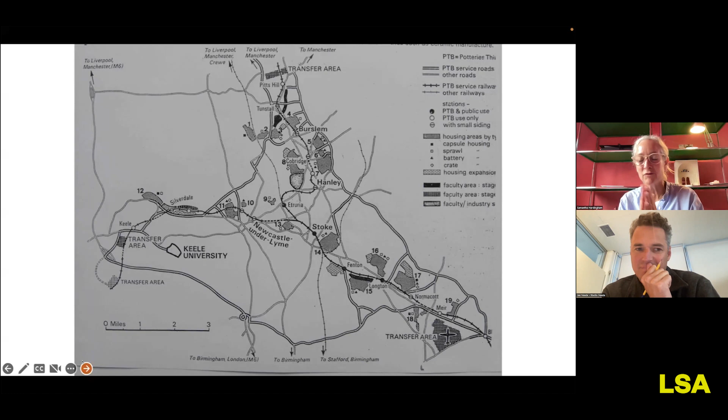But I really want to hand over to Jan, because I think what's important is this, just to remind everybody, this is 1964. We are now in nearly 2024. And that's an awful long time for thinking about, in architectural terms, the complexities of working with very dynamic systems, and really thinking about the reinvigoration of land and whole areas of countries that are undergoing massive change. And we are absolutely in that moment now. I know that Jan is working on a project which I'm just about to learn a lot more about, but I hope some of this resonates. So I'm going to hand over to you, Jan, now, and hear about what you're doing.

Well, it's difficult to pick up from here. It's always fascinating to hear from you about Cedric.

Let me see if I can share the screen. You should be able to see my screen now.

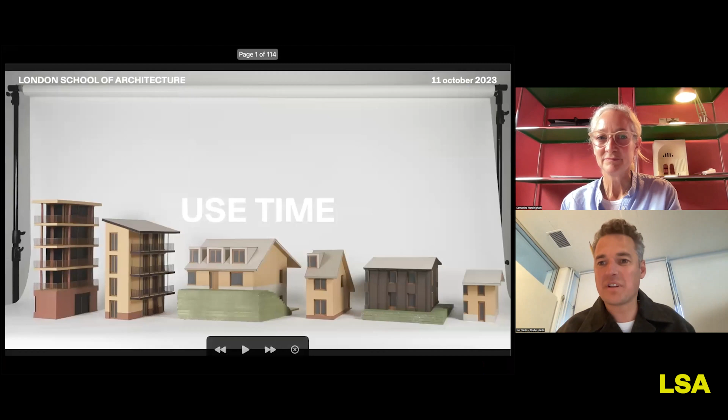I'm going to get nowhere near the sort of level of experimentation and inventiveness that you just described. I'm going to give you a small insight into a much more mundane form of practice, but it's always about time. It's often about Cedric, who is, to me, a kind of parrot on the shoulder, who has a kind of conscience role. And it's often also about housing.

I thought I'd briefly say something about who we are as a practice and how we work. And then I was going to show you two projects. I decided to make it one, so we can go a little bit more in depth. I also thought it would be good to show the process of acquiring such a project. I was thinking that this is something that I missed in school. It took me years after graduating to figure out how you get your hands on interesting work. So I'm going to talk about that as well a little bit.

So who we are and how we work. Well, Sam already gave this introduction. I graduated in London in 2011. And at the time, I really did not want to become a practicing architect. I was much more interested in making events, working on publications, exhibitions, a lot around Cedric, but also other things. I was fortunate enough to work with Samantha and work in fantastic institutions like Bureau Europa, like the Venice Biennale and Woodbury University in America. But after a while, I received an opportunity to do some physical work, like building work, and actually that was surprisingly good to me. So I decided to fully go for a career as a practicing architect.

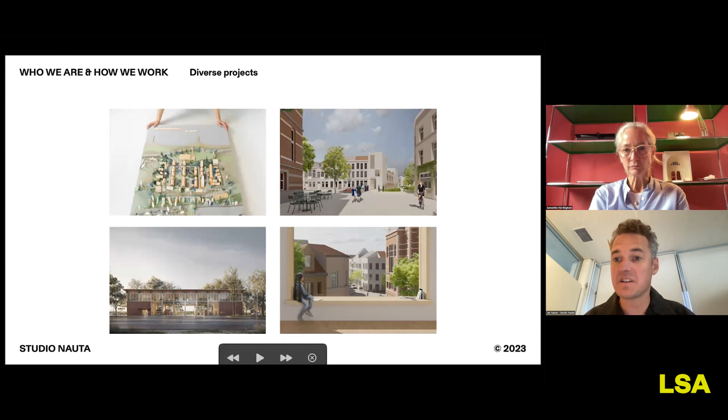In recent years, we're working on a much broader range of projects. So we're doing master plans, like big frameworks for housing. We're working on a library in Antwerp. There's a fire station also in Antwerp, so that's in Belgium. So the work tends to focus on community buildings, on larger housing projects where we are very interested in the sort of industrial transformation that the construction industry is currently undergoing with new raw materials.

And we will always continue to do small projects like this little swimming pool and a pool house. Those projects allow us to experiment with, in this case, materials such as rammed earth. We always work together, often with other architects, but always closely with clients and with builders. So that idea of really immersing with the world that the project sits in is important for us.

Also to create the kind of influence that we think we need to get the things that we think are important done. So that's just a brief introduction of who we are as a practice.

And from now on, I'll be talking about one single project, which is the garden housing city. Let me just see if I can make zoom smaller so I can see slides. There we go.

So this project started for us as a competition organized by the chief government architect that we have in the Netherlands. That's a kind of national program for spatial quality, and they have, for a few years, been working on this program for bio-based and nature-inclusive building. It's a program that tries to stimulate innovation in the architectural and construction industry, and they do so by organizing competitions throughout the country.

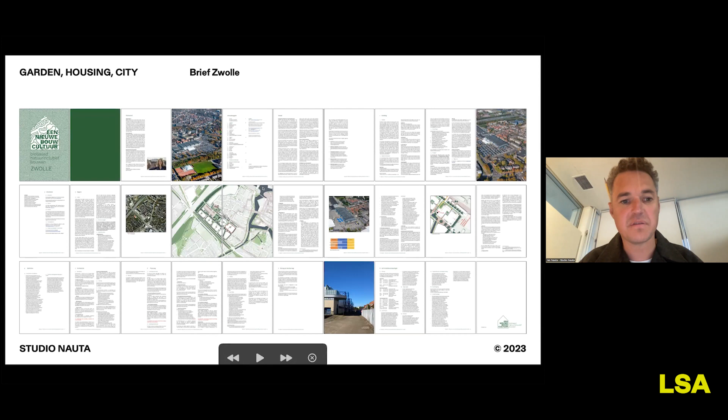It starts like this: it's an open call with a fairly compact brief where they outline the ambitions for the site, the ambitions for bio-based and nature-inclusive building, and what that is will become clearer as I show the project. But it's this fairly general invitation to participate.

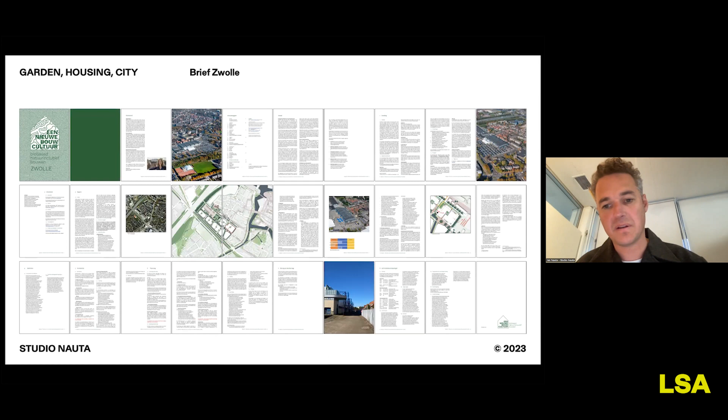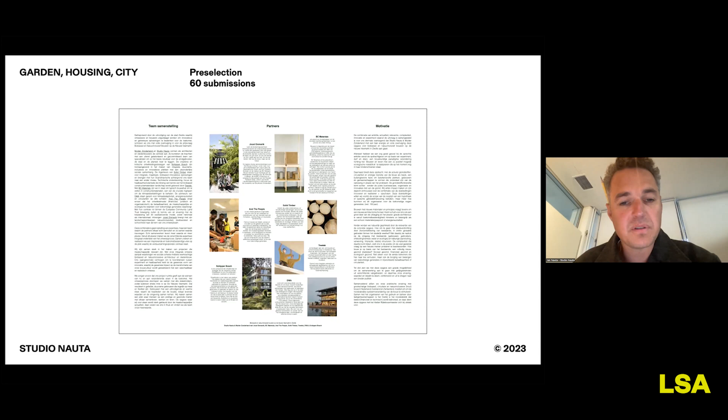So it starts with a pre-selection, and there were 60 submissions. And this is ours. We were allowed to submit 3 A3s. And what you see here is a proposal for a team.

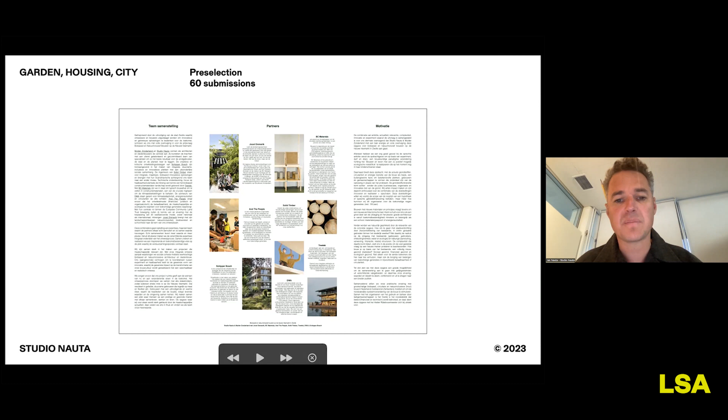So we decided to sign up with a broad team. The requirement was that you would be architects, but we included a landscape architect, a material specialist, a timber engineer, a timber construction company, a sustainability engineering advisory consultancy kind of club, a developer, a social entrepreneur specializing in community land trusts, and wrote a little motivation, showed some work of our office and Mulder Zonderland, which is a practice from Switzerland that we collaborated with on this particular project.

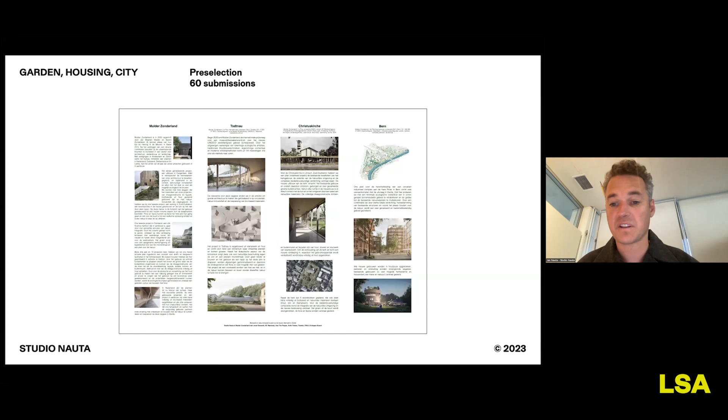So this is what it looks like, the submission in the pre-selection. That got us through to round one.

And in round one there were 5 teams left of the 60, and we were invited to make a compact vision on the site. So I think what you see here is a very rough drawing of what the buildings could look like, but it's a lot of ingredients that we proposed.

So it's about porosity, it's about an idea about energy, it's about water management, it's about a relationship to the delta, the rivers in the area. It's a suggestion about prefabricated construction.

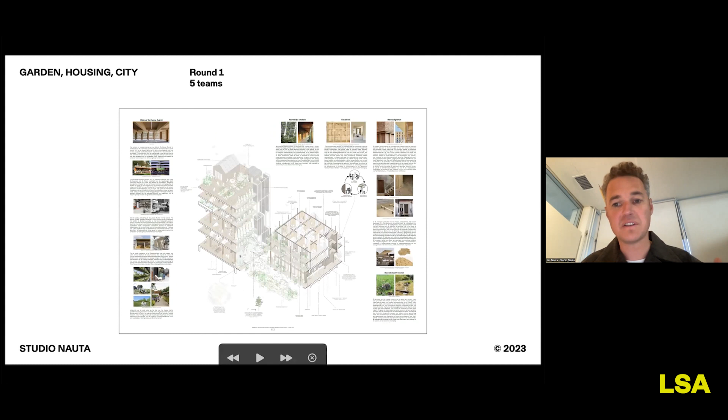So it's mainly kind of teasing them a little bit with rich ingredients, and then on a few points diving into it and illustrating how that might materialize. So these 2 A4s then got us through to the last round.

With a jury report, and that's always very straightforward. They appreciated the clarity of our vision. They appreciated that we understood the local situation rather well. They appreciated the suggestion that we would incorporate a community land trust. They thought the images that we were showing were fitting to the agenda.

And they were also critical of our use of architectural jargon, basically encouraging us to work on the legibility of our presentation. So it's as straightforward as that.

Then there's round two, or the final round, and I'm now simply going to show you the presentation that we gave at the final presentation of this competition. So again, that starts with who we are, introducing the team, so all the advisors that we had around us, and then what do we want? What do we want from this competition?

We identified three key pillars that we built the project around. The first one is to connect people, plants, and animals. The second one is to make a healthy city that would be accessible and would remain accessible, and by that we simply mean affordable. And the last one is to eliminate as much CO2 as possible. I've occasionally in the presentation stuck these slightly ghetto translations over the presentation, but I think you'll get it.

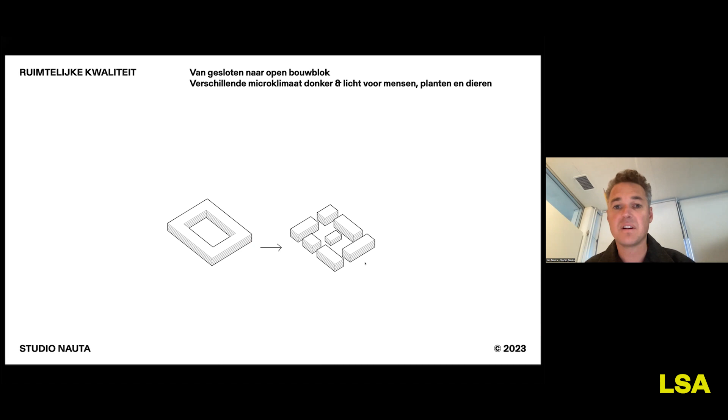So the first thing we said, rather than making a closed perimeter block that would be very logical on the designated site of the competition, we suggested to fragment it, to create many more microclimates, to create a lot more air, and to create porosity at an urban scale.

By breaking the block up, we also managed to connect to the secondary routes of this area. The site is a former cattle market where farmers would come to trade cattle. It's completely vacant now, but it has a neighborhood around it with a lot of pedestrian routes through it. The small scale of those pedestrian routes—we suggested we could integrate that, building on the logic of this neighborhood.

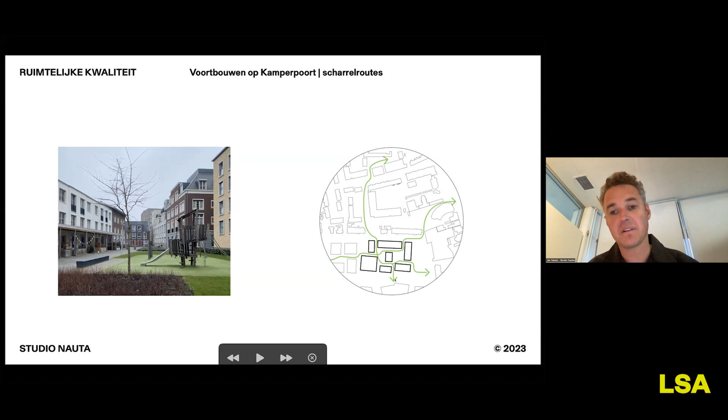The other thing we saw is that there are a lot of in-between spaces in this neighborhood—these secondary structures like balconies and porches, this in-between of public and private. We thought that was a great quality.

The other thing is that the old cattle market had a clear perimeter. It would always be open—you'd be able to get in and out without any problems—but there would be a clear marker, like a kind of gate. This strong feeling of being inside and outside, we thought was important.

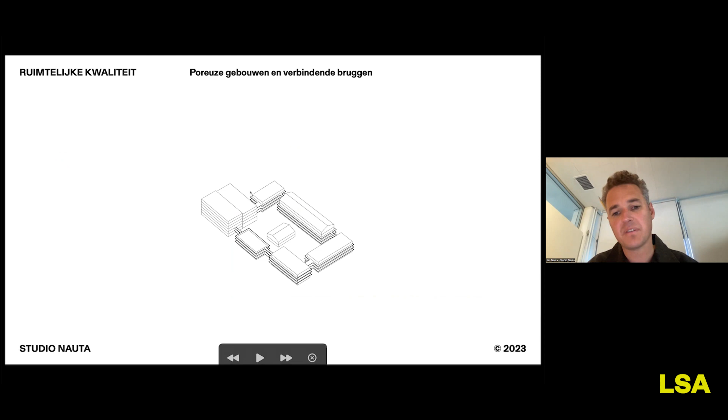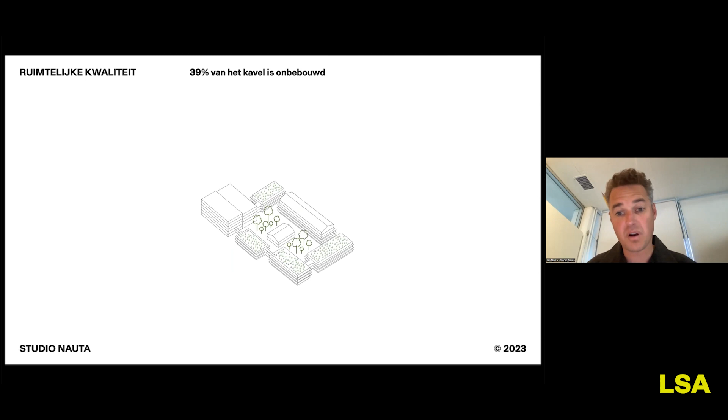The program, the actual dwellings that make up this housing project, is a mix of co-ops—corporation housing, which is, I guess, social housing in English—owned by a corporation that gives it out with subsidized rent. Then there's something we call the middle-priced apartments, all regulated by law in terms of cost. And then there's 32% open market, free market—that's where the profit comes from in order to pay for the other things.

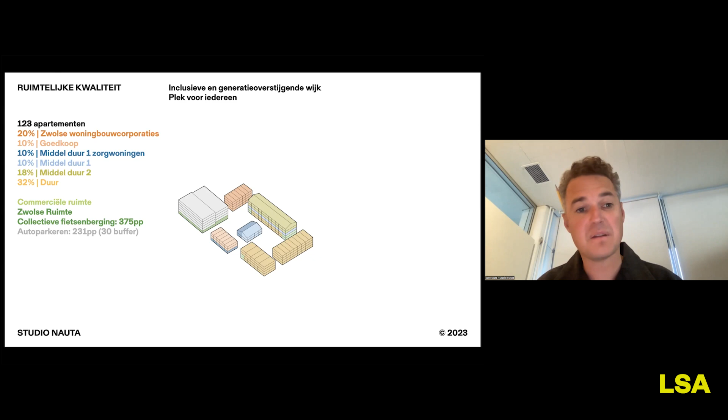I think this mix is really important. And we convinced the municipality and also the developer to give the best place not to the free market dwellings, but to the co-op. So that was a good thing.

Along with the architectural design, as I mentioned, we have linked a community land trust to this project—I'll get into that a little deeper later on. In this presentation, we also project a kind of timeline of how this community land trust emerges.

Actually, before we start construction, we start a dialogue with the local community about what the community land trust should entail and what the concerns should be. The neighborhood will form a kind of panel that we can also use as a feedback loop for the design.

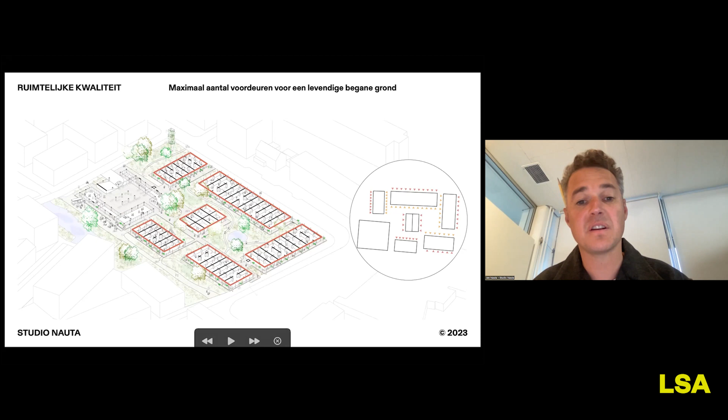What you also see is that there is one building that is not for housing—this is the hub building. It has meeting spaces for the people, a community kitchen, a community bicycle workshop, bicycle storage, and above that, for the next decades, also car parking.

The architecture is very straightforward, a very rational grid structure. That's for two reasons: on the one hand, to make the timber structure as affordable as possible, so small spans, very legible and clear, repetitive structural elements.

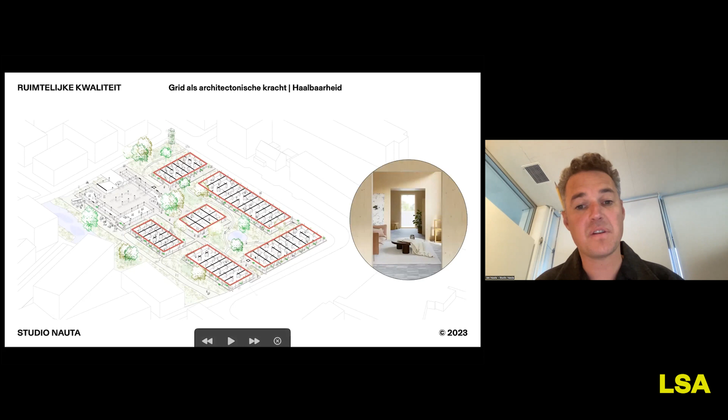But you also see that there's this kind of enfilade structure in the dwellings, so it goes from room to room, no corridor. That also adds to the flexibility of the scheme. On the basis of that grid structure, you're able to connect or separate these grid boxes both horizontally in plan, but also in section as duplex apartments.

The buildings are surrounded by balconies on both sides, which gives freedom—think of living on one side with a private balcony, and having a little business on the other side, so you could create multiple entrances to these dwellings. That level of flexibility, we think, is key for the future proofing of our cities.

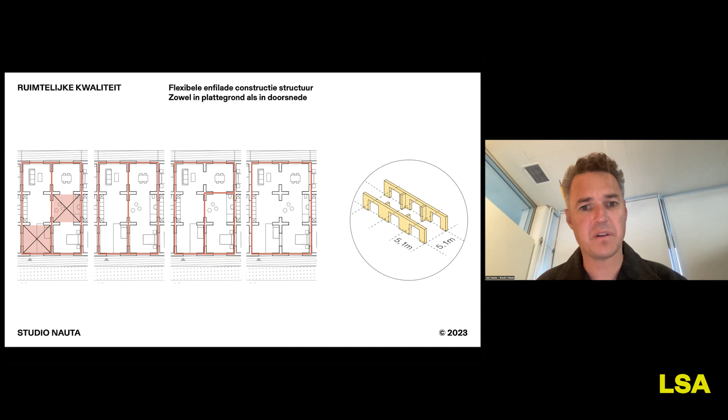So here you get an idea of that balcony, or that double facade that runs around all the buildings.

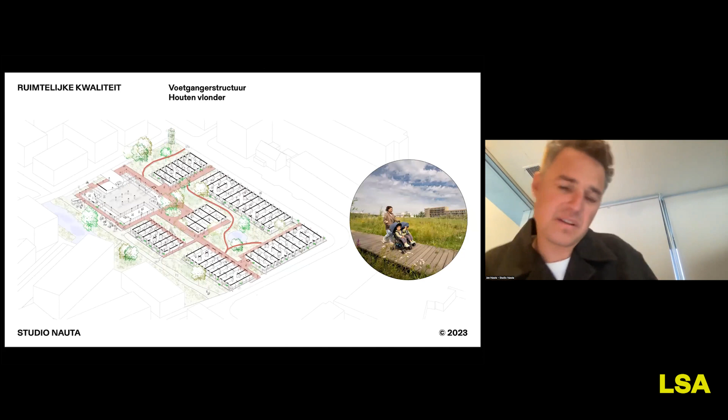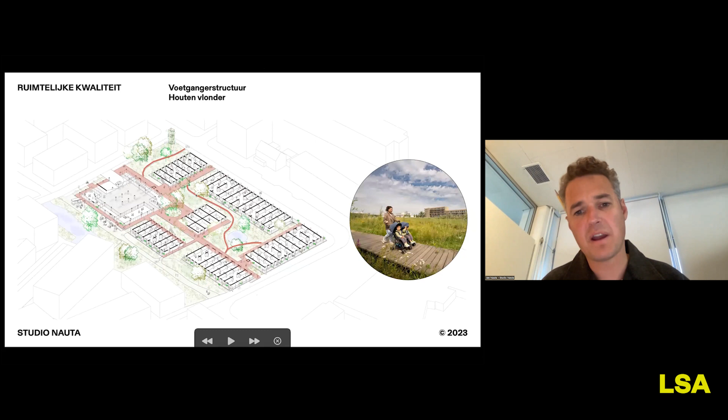I think here you see the ground plane. The ground plane is split up into two layers. There's a kind of pedestrian deck that's slightly elevated above the actual ground, with the idea that the deck is for people and the ground is primarily for plants and animals.

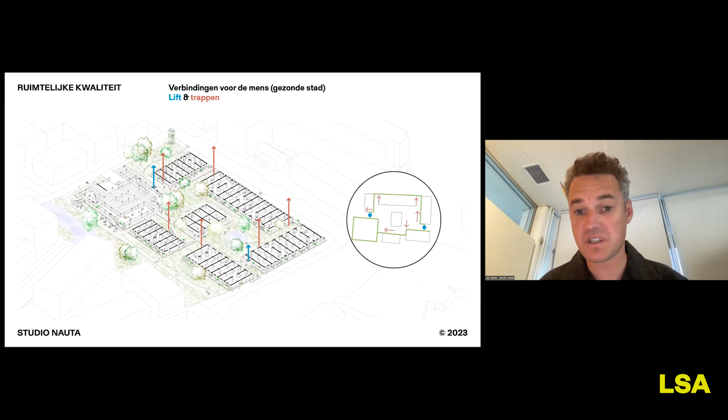By linking these buildings up with bridges, we were able to reduce the amount of cores significantly. The blue dots are lifts, and the red arrows are stairs. We're basically able to halve the amount of core space this way, leading to a more feasible business case, which we really need in order to build with all these bio-based materials, which are simply a bit more expensive than a traditional concrete way of building.

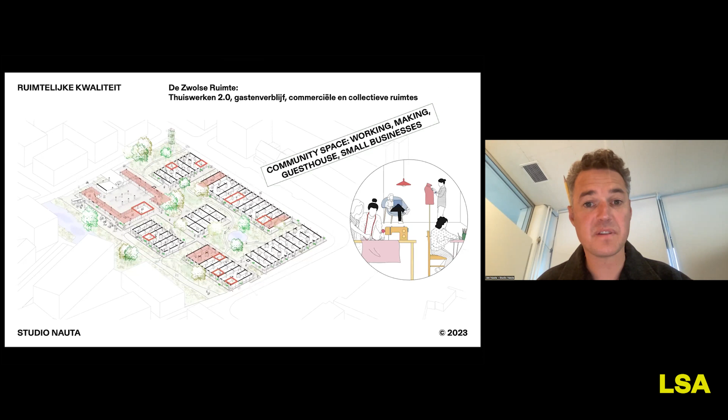As I mentioned, the hub building is a kind of community space. It has space for working, it has space for making. There will be a guest house, and there's room for small businesses. There's also a community living room and kitchen, and a bicycle workshop—lots of bicycle parking, so 123 homes and 400 bicycles that need to be stored.

This is Holland, so the bicycle also has the best space in this mobility building at the ground floor. Above it will, over the next decades, be a structure for parking, lots of cars. But we think parking is a temporary problem, so this building has been designed so that it can become a school, an office building, or more housing. It's very generous with the ceiling heights.

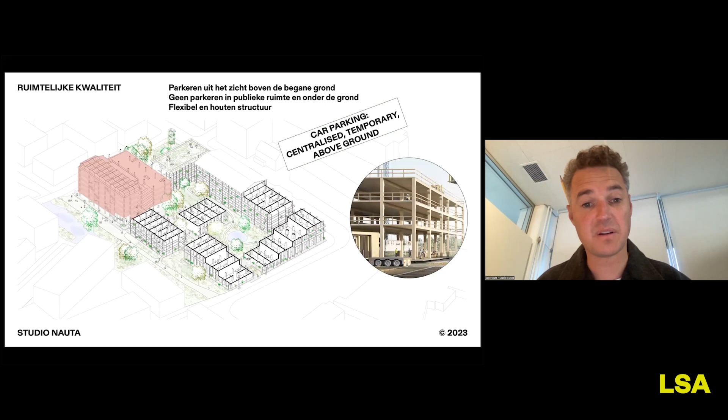Everything's in place for installations to be integrated into the structure, and it can also be dismounted if necessary, because all the connections are dry—nothing has been poured. And here you see a kind of speculation of what that plinth might look like.

So the idea is that in 2026, two years after we started, the community land trust will actually be founded on the basis of the rule book that's been made up with the local inhabitants. This is the key moment where the members of the community land trust give their final input for the material agenda and the architectural agenda of the project.

I'm going to skip a few slides so that we can make it all in time.

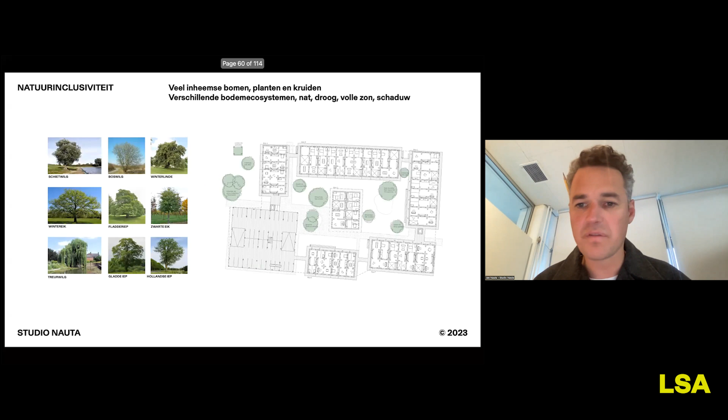Obviously, there's a lot of attention for biodiversity—the kind of trees we use, the kind of nesting spaces integrated in the buildings, so bats in the roof. The buildings are all lifted so that animals such as mice, snakes, and these kind of things can all go under the buildings, so the trajectories through which they move through the area are much larger than if the building would stand on the ground.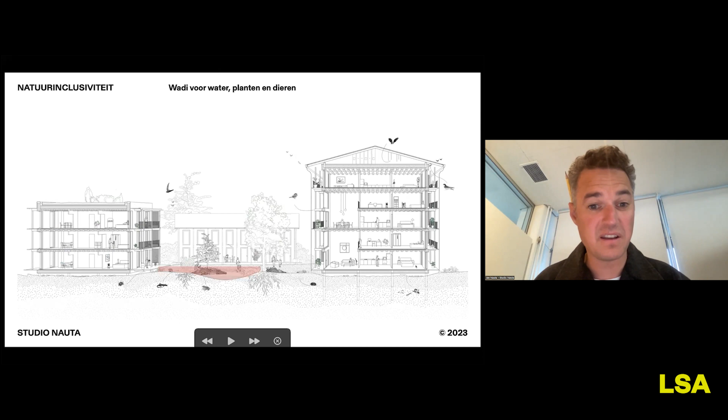That really adds to the biodiversity, and you need all the insects, obviously, to attract the birds, so we work with an ecological expert to carve out as many fertile spaces for animals around the building. You also see that double facade that's also a key nesting space for birds.

Here you're standing in the middle of this project, so you see the raised decks, you see the actual ground, which is a combination of water retention and vegetation. You see that there's no private gardens, always decks. All the dwellings are oriented around this green heart, and you see that the stairs always get priority over the lift—we really try to encourage people to move physically with their body.

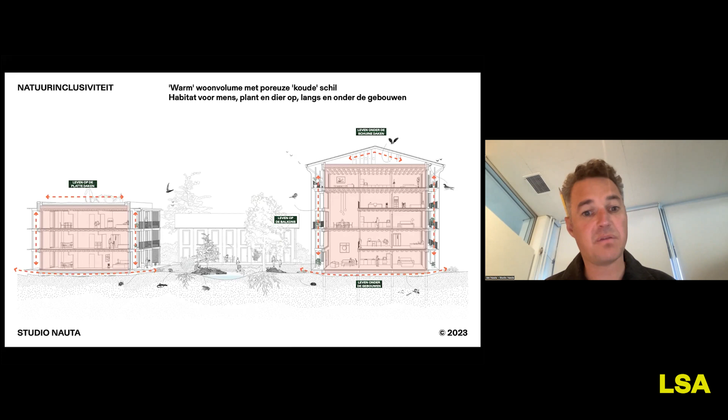This section also has an economic side to it. The buildings have been made in the simplest form, because the thermal envelope is the most expensive part of the building. So the simpler we make it, the more affordable it becomes. The richness in the forms comes from the cold structure around it. By separating the two, we gain a lot in the business case, through which we can then afford better materials, make floor to ceiling heights a little bit more generous, etc.

Jump through that quickly. This is the idea of the structure of this community land trust. So the main stakeholders are the inhabitants, but also people in the surrounding neighborhood have a real stake, and the municipality has a stake. And then the community land trust has a number of sub-associations.

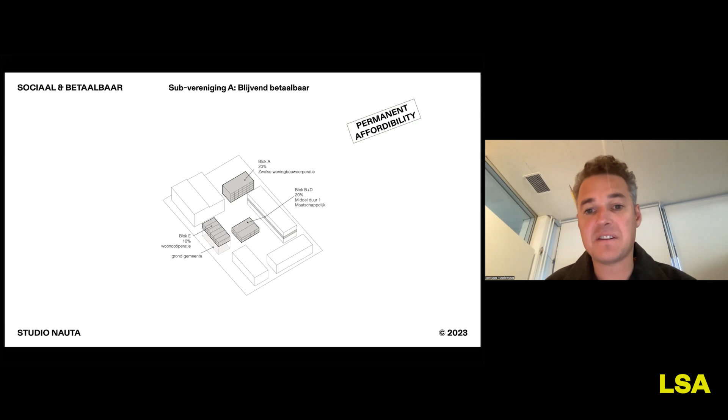One is to do with circular materials, so where do the materials for the buildings come from, and where do the materials for the maintenance of the building come from. One is about mobility. One is about the hub building, the collective spaces. And one is about permanent affordability, to ensure that these homes are kept out of the sphere of speculation. They will not be part of the housing market, but will remain in ownership of the cooperative. That's the idea of permanent affordability. It doesn't apply to all the blocks, but to the darker gray ones here. So that's also a balance in the business case in order to get it done. It's the mobility building, it's the hub structure, and this is the circular material.

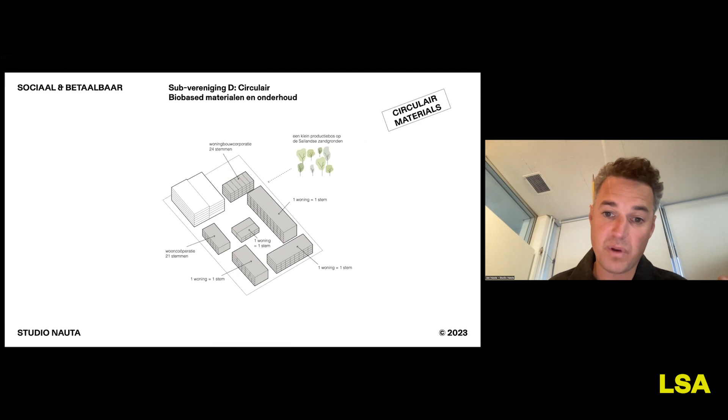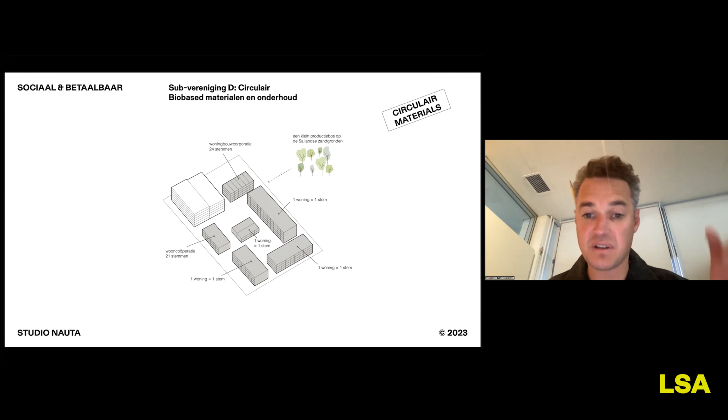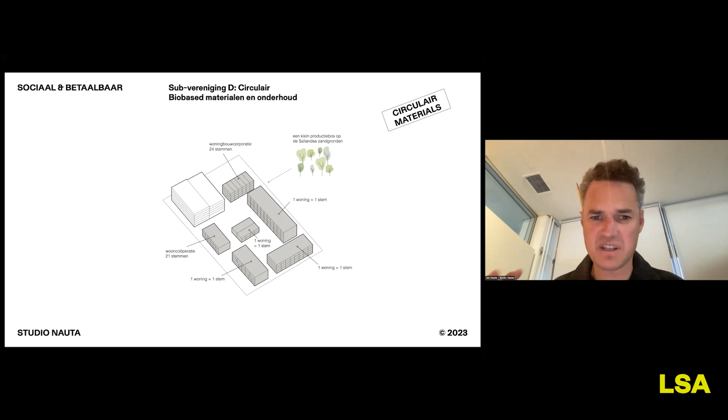This sub-association applies to all the housing blocks, and the idea is that collectively the community land trust will own a small bit of forest a couple of kilometers from the site. The idea is that collectively, when the houses are done, we plant new trees, and in 30 years, with those trees, we can maintain the facades that are made of these timber shingles from our own trees. So that's also this idea that this new material agenda provides opportunities to create a closer connection.

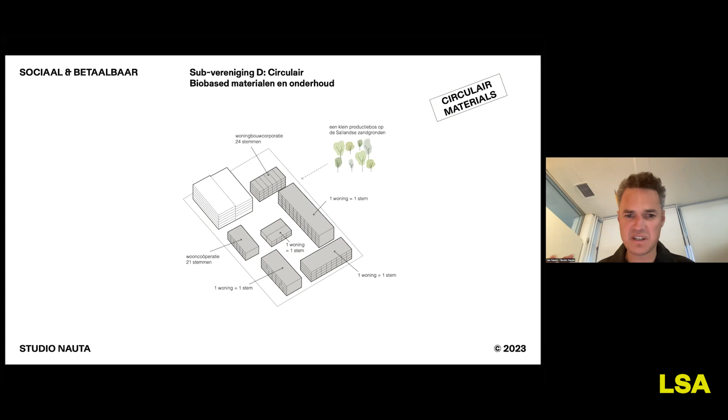Okay, I'm going to move ahead, conscious of time. I think this is how we set about selecting materials, or a material agenda.

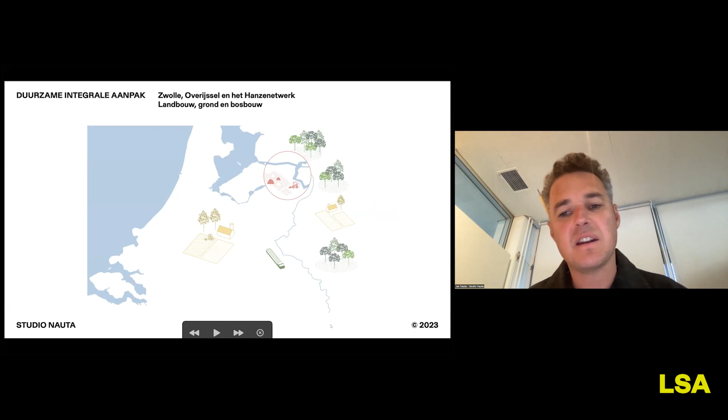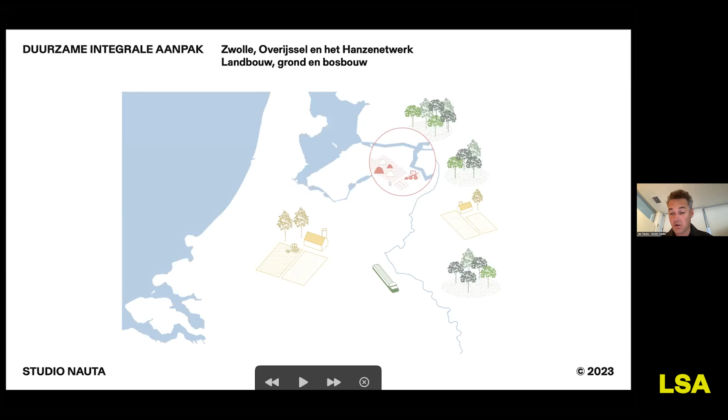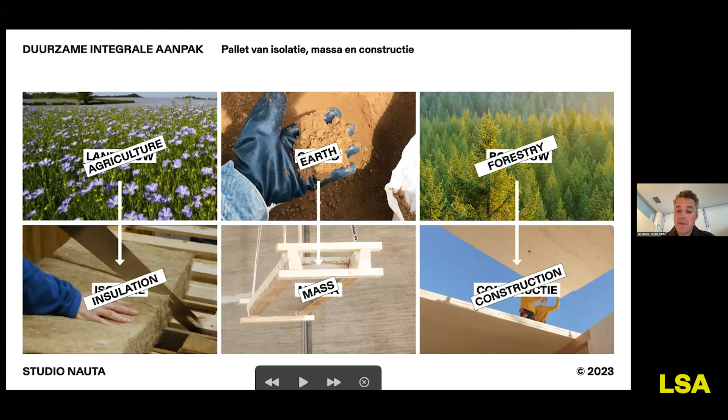Our site is here, in the middle of this delta, connected to the rivers, and those rivers eventually bring us to the forests in Germany and in Austria. Over the water, we can bring structural timber here in a very clean manner. Around us is first of all land that we can use, so earth, but there's also agriculture. So the three key sources of this project will be local agriculture, giving us primarily insulation materials; local earth, giving us mass that we need for acoustic insulation and also for thermal mass; and forestry. That will mainly be from Germany and Austria, brought to us over the river, and that will be the key construction material.

Extra attention for the shearing layers of change model of Stewart Brand. The electricity that I was just pointing out in the image is part of this, and the idea is that you do not unnecessarily connect the different layers of a building, so you disconnect installations from structure, for example, in order to always have the maximum lifespan of those layers.

The building is built on timber foundation piles that have a small concrete top to deal with the moving groundwater level. Here you see the idea of the electricity being on the walls instead of inside of it. Sounds very simple, but it plays a big part in future-proofing those walls. If the electricity is ever something wrong, you don't have to open up the actual structure of the building.

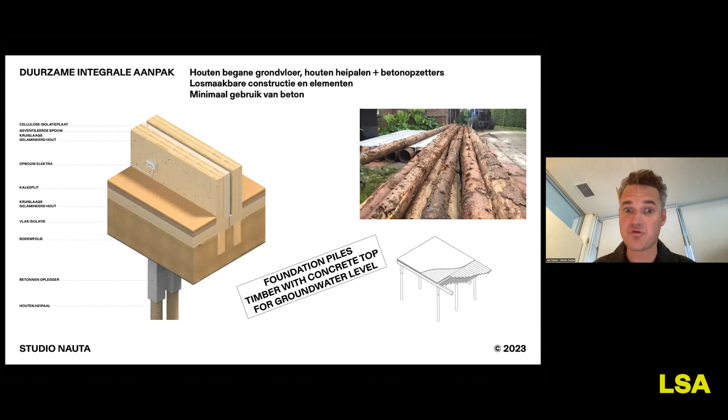A clear CLT structure, relatively small spans to keep everything thin. What you see here is the floors are made of timber beams, so they're not glued-in. There's no glue in them. They're full timber, and they have small little sandwiches of rammed earth.

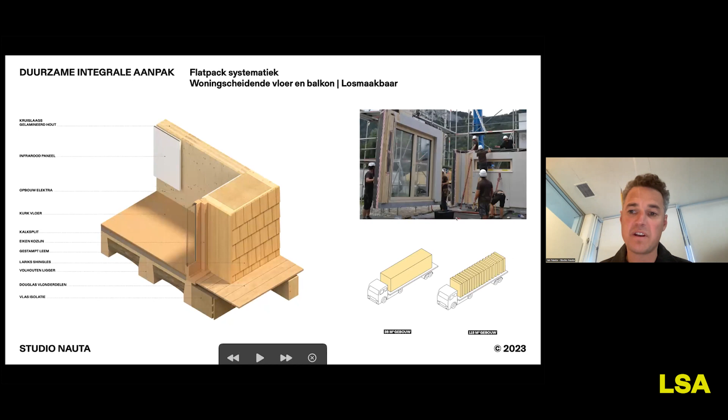So it's a combination, rammed earth and timber. Everything is designed in a way that it can be flat pack prefabricated. So what you see nowadays is a lot of modular construction. You make elements that can fit on a truck, and you stack them on site, with the advantage that your building can be put into place very quickly. We actually suggested to do it in an IKEA manner. So it's flat pack, a little bit more mounting on site, a lot more freedom in design, and much more efficient transport.

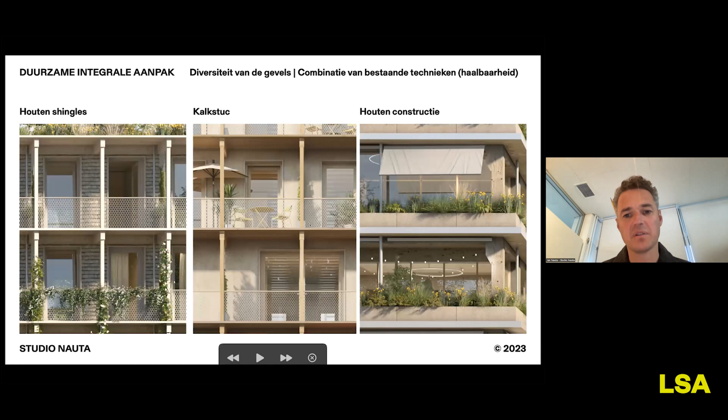Key materials of the facades are shingles, timber shingles, lime, render, stucco, and timber, the actual construction inside. We do make modules of the wet cells, the bathrooms, the toilets, so they can be produced in the factory. You get much higher quality than if you do that on site for a better price.

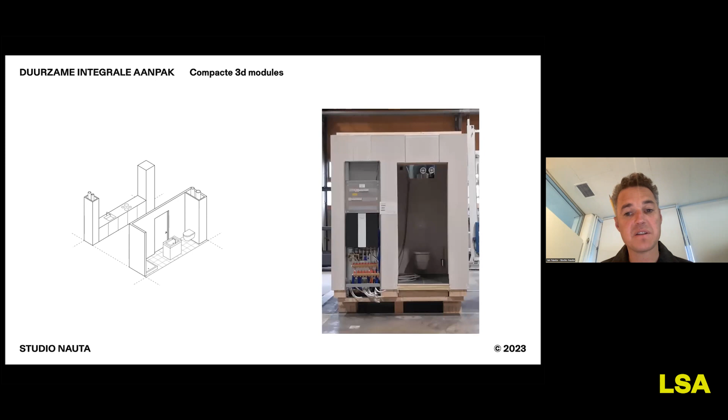Then this idea of the secondary structures. We surprise everybody by actually rendering the construction site. So what you see here is that everything, first of all, is light. It can be transported with electric cranes rather than the traditional ones. Here you see these flat pack modules, these compact 3D modules, and basically a clean and very silent construction site.

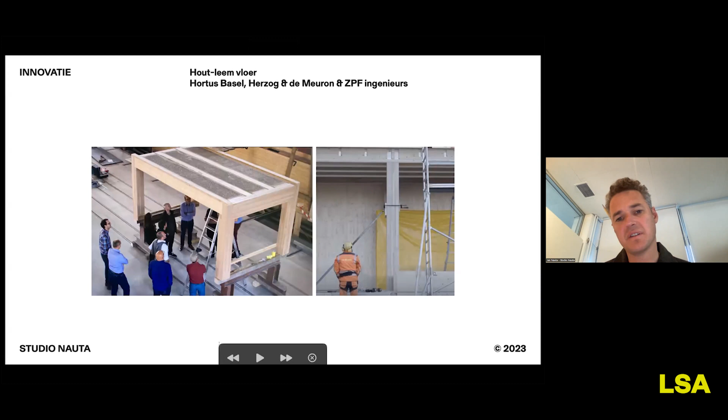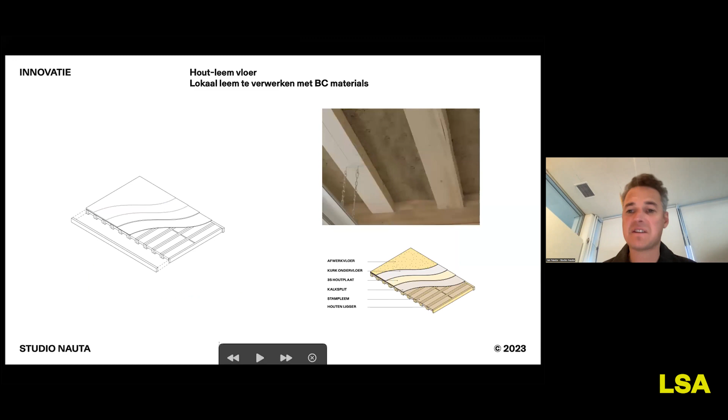Here you see those floors, the timber with rammed earth floors. Really fantastic innovation coming from Switzerland. This is a good example, I think, of best of both worlds, using the fibers of the timber to create the spans and using the mass of the mineral rammed earth for thermal and acoustic insulation. I'll skip the energy part.

Then we make a big jump to 2080, where the Community Land Trust can now decide to reprogram this mobility hub into a school or into offices, and is harvesting for the second time the trees for the new shingles.

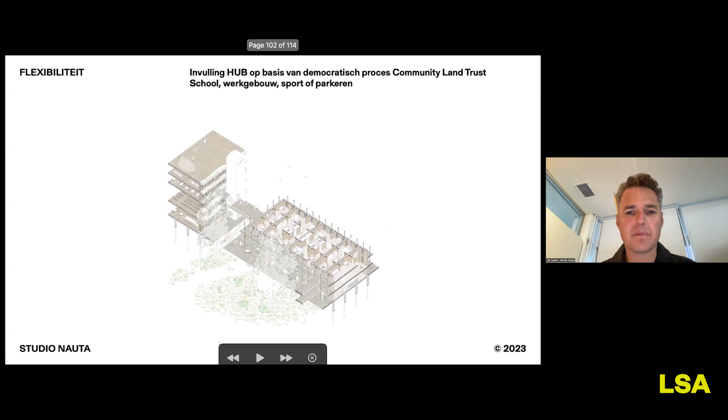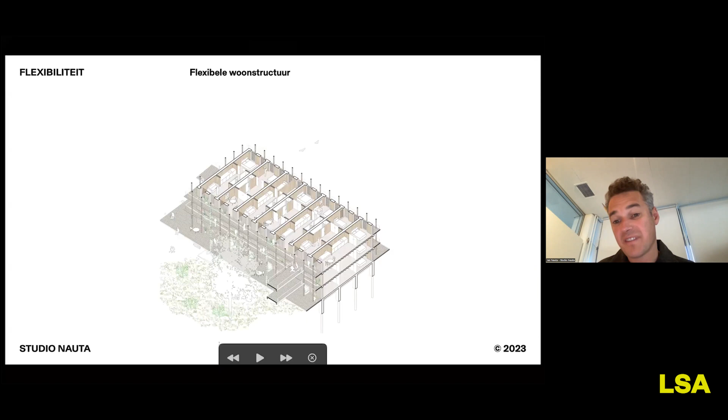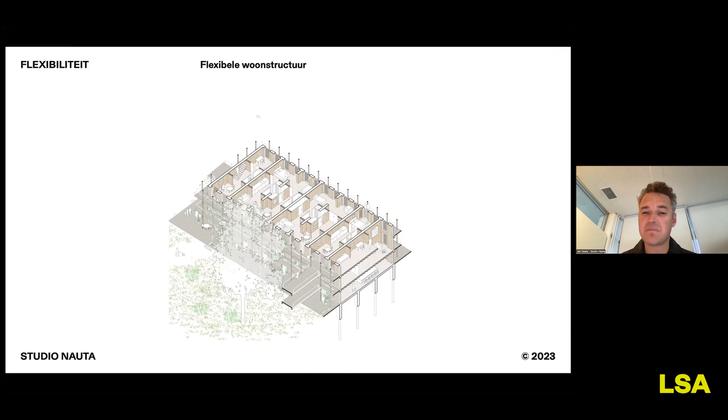I'm going to skip through this, otherwise we won't have time for questions. So I think this is the last bit, the idea of these flexible dwellings. I've shown the diagrams before, but with the structural engineer, we work very hard to create as much openness in the structure as possible. What you see here is that these dwellings can be combined in plan and in section, but also in circulation. So there's many places where you can make new front doors, that can be for businesses or for a multi-generation home. But the flexibility in that structural design has been very important to us.

So coming back to time, this is how we concluded our presentation in the competition. It starts by looking what came before. The first step will be to transform materials that we can harvest locally and in a clean manner. Then there's mounting, and there's first inhabitants, and there's the first wave of adaptation. And then after a couple of decades, the actual use of these structures will be very different. That's where I'd like to stop. I think we've got 15 minutes left for questions, and I very much look forward to them.

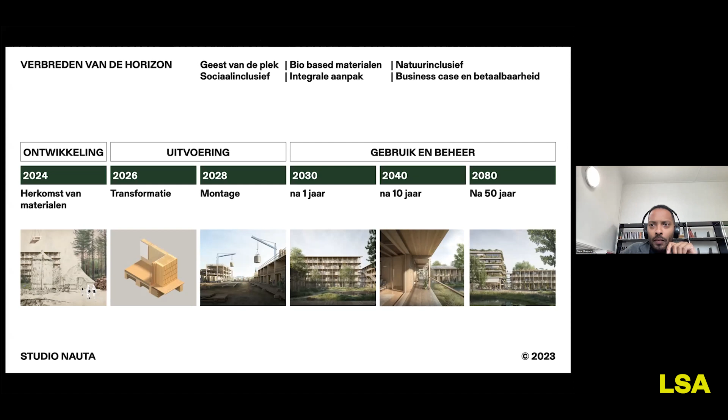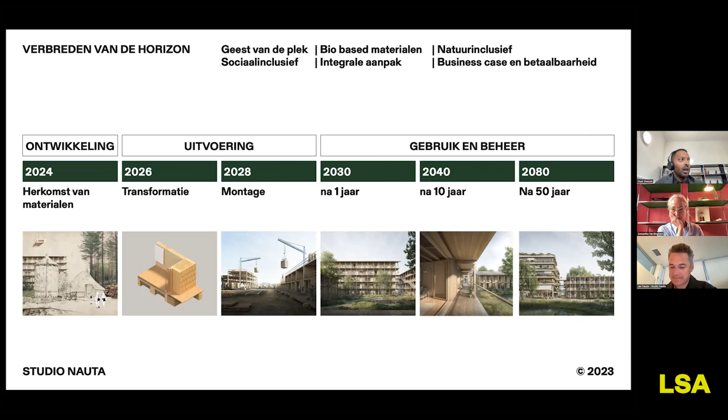Thank you very much. That was a really brilliant talk, I think, covering a lot of issues relevant to our students and to contemporary practice more broadly. I've got a couple of questions perhaps to kick us off, and then I'm sure others, not least Sam, may want to pick up on certain themes in your talk. I suppose the kind of obvious place to start would just be to ask you to reconnect explicitly what you were just presenting, to summarize how this dimension of time has been at play in your design process, and what connections you feel there are to Cedric Price's kind of mode of inquiry.

As I said in the beginning, it's always about time, and I think now with the themes of sustainability, we really have to think much more critically about that. I think Cedric was way ahead of his time, embracing things like uncertainty as a kind of design strategy. As I said, for me, he's been the parrot on the shoulder, kind of pushing all those things and being serious about them in a technical manner, but also in an organizational manner. So it's not just about the building, but it's also about the social structure that goes with it. And they cannot work in isolation, they have to work together. I think that kind of composite idea of thinking about space, to me, is something that I only was able to understand through Cedric's work.